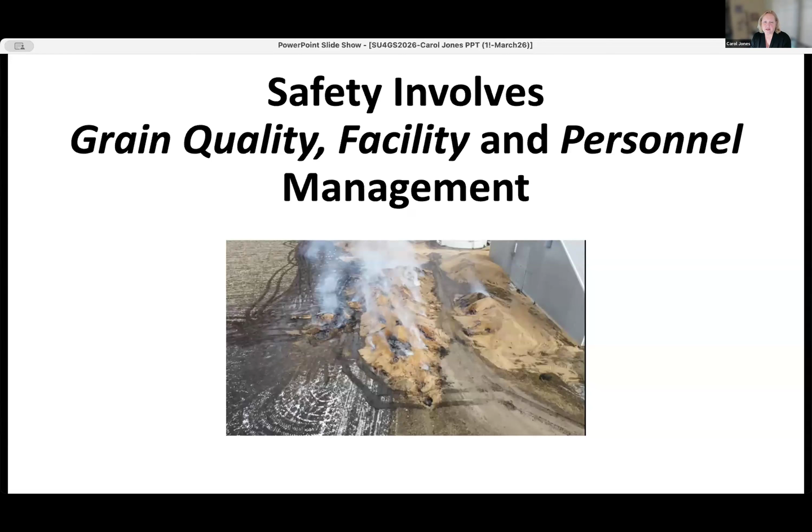So today we're going to talk about just the design and the equipment and some of the processes that are involved with that. So we're going to talk about one piece of the puzzle today, but please remember that none of this stands alone. It's all part of a system. So we're going to talk about, go to the next slide, please, why this makes a difference to us.

And obviously, profit, I won't say it's our number one goal because safety is, but profit's right up there with it. If we don't keep people safe, we don't make a profit. And if we don't make a profit, none of us come to work the next day. So we have to remember that we have economic decisions to make also. But the safe working conditions are just paramount, and our industry is one of the most dangerous industries.

Of course, I've seen you've got some pictures of fires there, but we have the engulfment and entrapment problem. We have high angle rescue type situations because we're working up on top of our bins and get into trouble up there. There's just so many things that can go wrong in our facilities that are very unique to this industry.

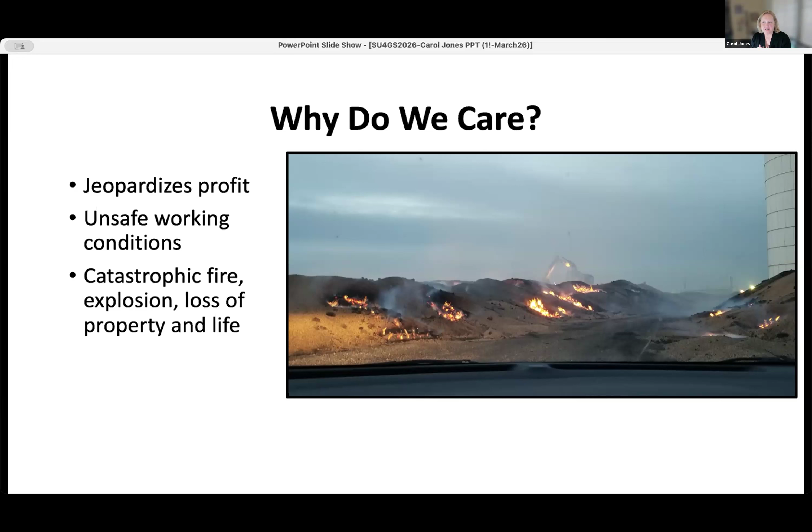So we will talk some about the design of our facilities that can help keep us from encountering some really catastrophic things, whether that's fire, explosion, loss of life, loss of property, engulfment, entrapment, bin collapse. All of this ties in together into one topic of designing our facilities so that they are profitable and that they're safe. Go to the next slide, please.

We hear a lot about moldy grain because that is one of the major safety issues that we encounter, and it's a problem all over the country, but particularly where we have situations of fluctuation of temperature. I don't know about the rest of the Midwest this year, but we have had numerous days, including today, where we start out at close to freezing and we're at 90 degrees, even in March, this early in the season. And those fluctuations of temperature are what cause condensation.

Our facilities many times have leaks, things that maybe maintenance could help us with. But the condensation that comes down in on top of our grain or down the side walls or up in the headspace, from a design standpoint, is impacted by our management and design of aeration systems and the vent structure in the top of our bins.

When we do have moldy issues, it's like the top left picture there, I can see all kinds of bad things about that. He's working without a harness, and there's these big clumps of grain that have fallen, stuck together grain are coming down. That's all a moisture issue that bin has encountered.

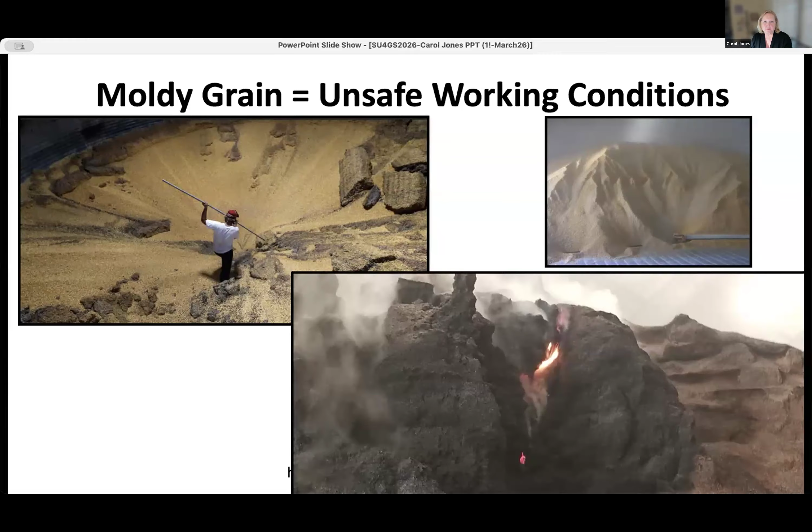As I just mentioned, we've got the self-combustion problem. It happens with moisture. Moisture leads to mold, and insects, particularly in the southern part of the United States or in a warm area, can actually set up housekeeping in our bins, usually in the top, in the middle, or around the access points, unloading points. They will populate to such a point that they generate heat and it could actually cause combustion.

So make sure you check your fumigation plans and stay on top of that. And we'll talk more about detecting this heat generation in a bit. Next slide.

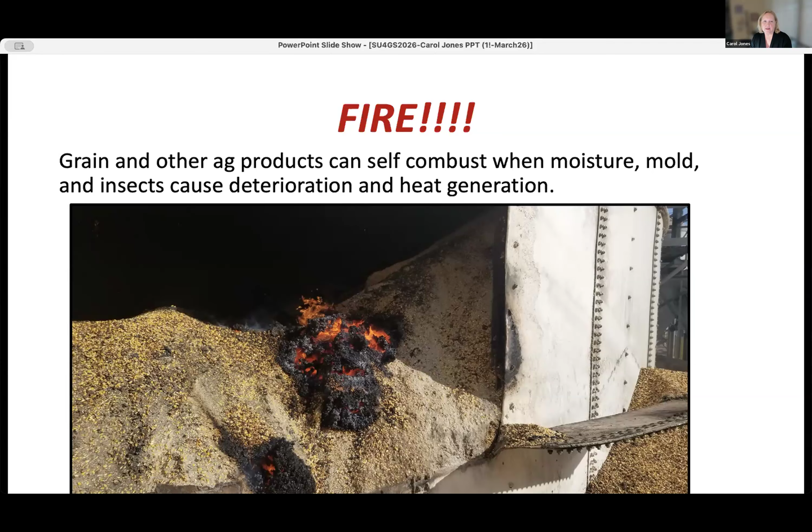Get more into the design and maintenance of our facilities. We've got two pretty impactful pictures here. Anytime we have a sloped floor in a bin and we try to aerate that, that's some real challenges. You need to work closely with your aeration contractors to make sure that we've designed that aeration system down into that cone underneath our bins.

This one, their aeration system didn't work, and they didn't think that would be a problem because they put some pretty dry grain in the bin. But as you can see, we had a problem. It actually self-combusted because they were not able to aerate.

They had some moisture issues down in the bottom of this bin, probably from some high humidity in the unloading area underneath this bin. They did not have temperature cables that went down into the cone and they weren't able to detect it. So they found a big problem when they went to unload this bin.

And over on the left, again, we see a self-combustion issue that happened down in the grain bulk. I'm not real sure what caused this particular situation, but I do know they weren't monitoring temperature cables.

It's one thing to have temperature cables, and that's a great design, and temperature cables are indeed your communication with your grain and storage. It tells you so much, even if you don't have a very intensive set of cables. Monitoring those cables, that's your conversation with your grain. That's when your grain can say, hey, I've got a problem, and if you listen to me now, we can resolve this. If you put it off, I'm going to have some big problems.

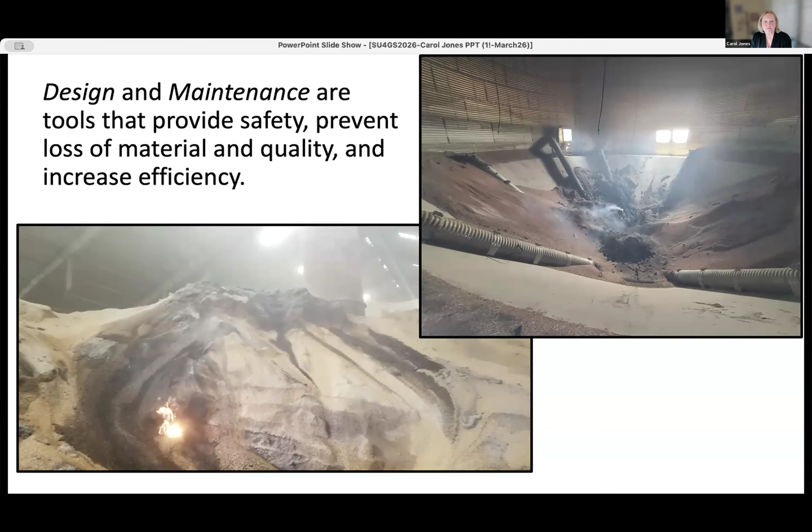So how do we do all of this? Where do we start to look? And there's a lot of resources out on the web. All of your bin manufacturers have great educational resources. Of course, GEAPS, NGFA, most of your land grant universities have information out on the web, and it ranges anything from the quality of the grain to safety to bin design and management.

So be sure and go out and look for some of that information. And most of us agree on just about all of the topics, so you can assure that you're getting good information. The American Society of Agricultural and Biological Engineers is another great opportunity for you to get information.

Many times it's seen as an academic organization, which it is, but we have many, many manufacturers and industry people as members. In 2018, we gathered before 2018, it's just about a 4-year project. All of the bin manufacturers, the major bin manufacturers, some safety training experts, some universities, some of our larger bin companies and bin users, and some fire departments actually came together in a group to talk about what kind of standards we could put in place to make our grain bins safer.

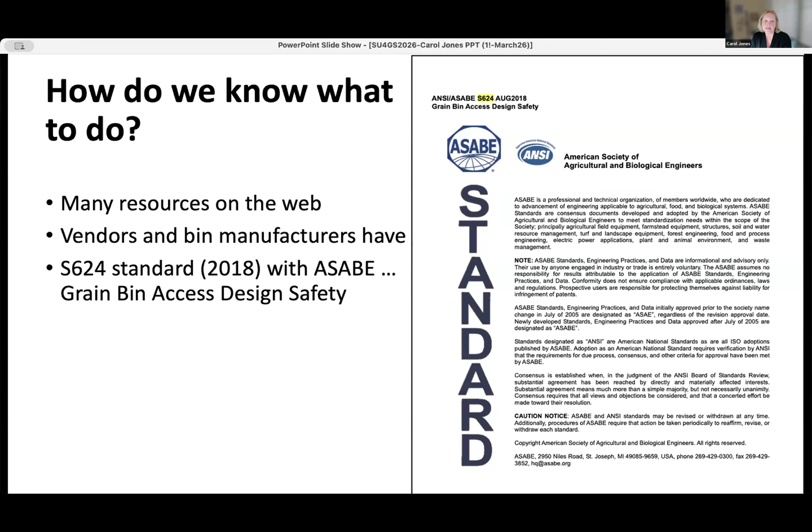Next slide, please. The first thing we wanted to address in this standard was bin access. I'm sure all of you, if you've not had this happen at your facility or experienced it yourself, you've heard stories about access to the bins. Someone stepped out of the bin and missed the little 6-inch step that was not in the right place and fell backwards and hit their head, causing a concussion protocol. Maybe there's no place to step when you step in or out of the side access. And so we put a ladder under it. That's probably not the best practice either, on the inside or the outside.

Where our manholes or our access on the roof is located is a huge, huge issue. I would say 75% of our bins out there, the ones that I've seen anyway through the years, that manhole is probably 90 degrees around the side of where our ladders and our platforms are. Well, that exposes your worker to just a free fall environment there for a quarter of the way around our bin just to get in the hole. So when we put our bins up, if we can put those manholes closer to our ladders and actually have a platform underneath, that's a much safer situation when you try to work through that open access on the roof.

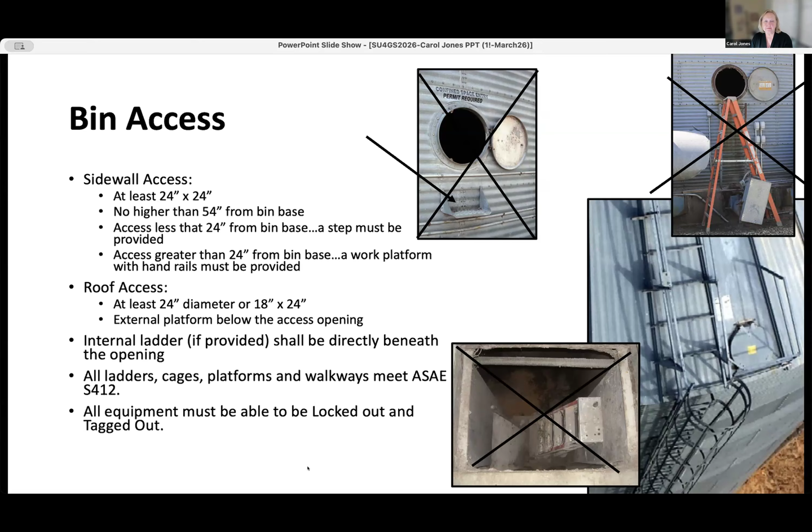The next thing that I'd like to visit about in this standard is anchor points, this idea of attachment points. And that is something that, other than one manufacturer through the years, has not been provided. There's no place to tie off to. If we wanted to, we couldn't, because there's no place to tie off to in a steel bin. Sukup, I think, was one of the first bin companies that actually provided an eye bolt on their bins, and they were well ahead of their time. Long before this committee for the standard was developed, they were doing this. So we looked to them for some information.

There needs to be two anchor attachment points, one near the peak of the bin and then one near the roof access, in other words, the manhole. The one up in the peak is for a pulley, a knot-passing pulley. And you can see there in the slide what the weight limitations need to be and how that was determined by our committee. A lot of discussion went into how much weight does this need to handle. And so a minimum ultimate load of 2,000 pounds and a working load of 1,000 pounds. And these attachment points are meant for one person only.

Why then do we design for 1,000 pounds? Well, many times we need to withstand an impact. Perhaps our person loses footing and drops a ways, or they break through a bridge and they take a pretty good fall. So those anchor points need to be able to withstand that impact.

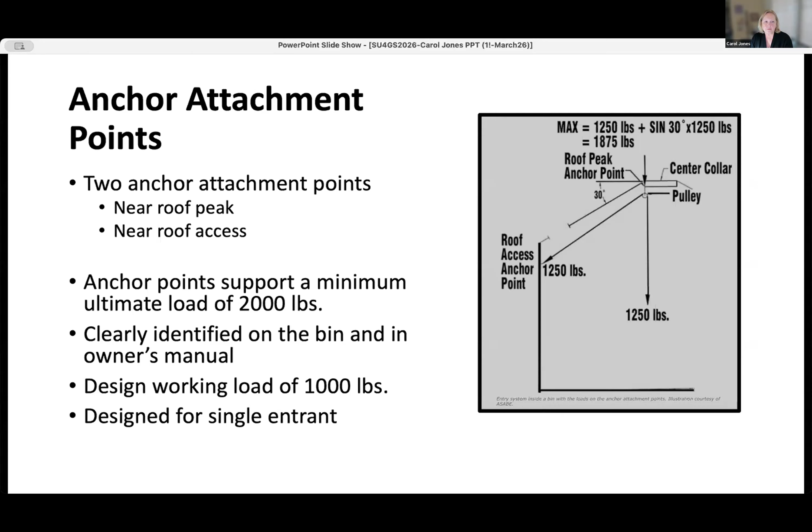Safety decals. Of course, ANSI, ASABE, and a couple of other agencies, including OSHA, require different bin decals. These are the two that are the most often used and most often required. Make sure that those are readable. Make sure that they're bilingual. And unfortunately, I didn't pick a picture where they were, but make sure that you have your language barriers covered. Pictures are good because they bridge the language barriers. Our Global Harmonization Act really helps you with that.

Go out and look for those pictures, but make sure that your decals are not so old and faded and cracked that they can't be read. So, do workers read them? Well, I hope so. Sometimes we have to do the best we can and hope for the best, but they sure can't read them if they're not there. So be sure to have all your decals in place. Next slide.

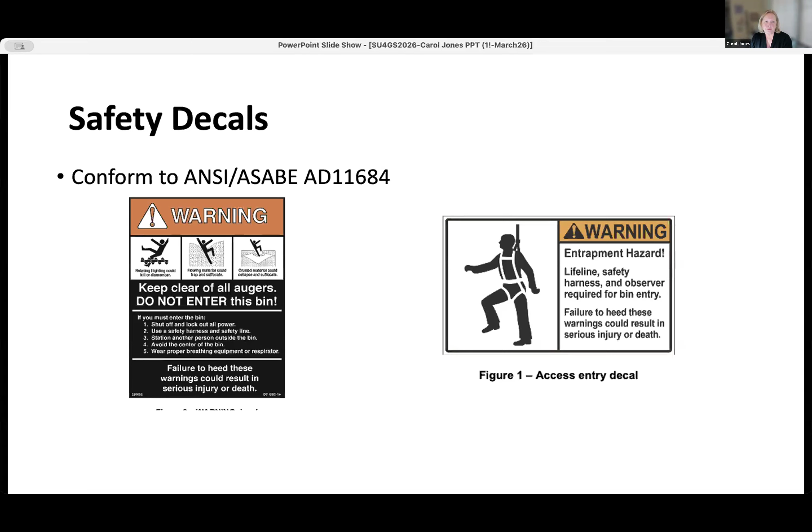Talk about these fall prevention systems. The two anchor points near the roof and near the roof access are important, with the pulley being up in the roof peak with the knot-passing pulley. The rest of that system includes a full body harness. This is not your lightweight working harness. We're talking good attachment points, padding around the legs.

If you've ever had to hang from a harness for more than just a few minutes, you'll be the first one to go out and buy one of these harnesses that has the good padding around the legs. That's part of the safety issue also. We don't want to cut off the circulation around our legs. Going to have a sufficient rope. If you've got, say, a 90-foot bin, your rope's going to have to be at least twice that. Okay. And of course, the anchor, we've already talked about the anchors.

Now, an important part of this is not even a structural part, but it's an attendant at the opening. It is an OSHA requirement, and then just a really, really good idea to have someone working there at the access point of the bin. Their only job is to stay in contact with the person in the bin and to call 911 or alert someone if there's a problem. Their job is not to go get you water. It's not to go get your work clothes. It's not to hand you a flashlight. That's not their job, and they're not supposed to do that.

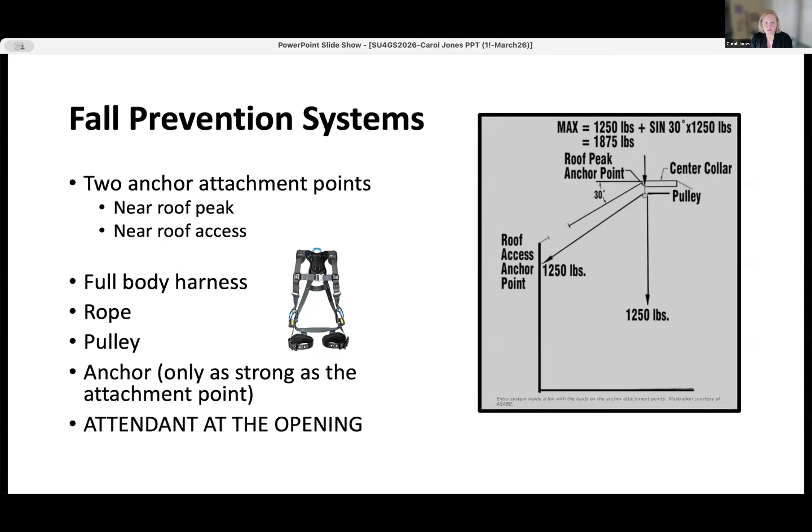Their job is to make sure that they're in contact with you some way. It doesn't have to be verbal. It can be line of sight. It can be by radio, but some kind of access and attachment communication with the person in the bin. So that's a piece. That's just as important a piece as the full body harness or the ropes or the pulleys. So make sure you work in pairs. Next slide.

We'll switch from entrance safety to outside of our bins, and we've talked about electrical safety for all of our lives. I can't remember a time when we didn't talk about electrical safety. But I guarantee I could walk in any facility this very minute and find a problem. Electrical safety encompasses every single inch of our facilities, and it's an easy thing to overlook. Our older facilities, times have changed. Our regulations have changed. Our knowledge base has changed. What equipment is available to us has changed.

So let's kind of look at some of these pictures because some of them are more intuitive than others about what the safety problem is. But of course, we start with the plug-in up there in the top left. It has a crack in that bottom receptacle. That needs to be fixed. If it's around any moisture, it needs to be a GFCI type plug-in. If we go down below, that looks pretty innocent until you see the opening in the side of that box.

That's a safety hazard. This is a little side story that I'm not sure Oklahoma State University would like me to share, but they shared it, so I guess I can. About a week ago, we had a lizard get in an electrical box on campus, and it shut down at least half the campus and our electricity. Of course, it blew the breaker and shut things down, so we didn't have a fire or a catastrophe. But it was because a lizard could get in one of these boxes. So make sure that your boxes are sealed tight. Also, from a dust standpoint, that's just essential.

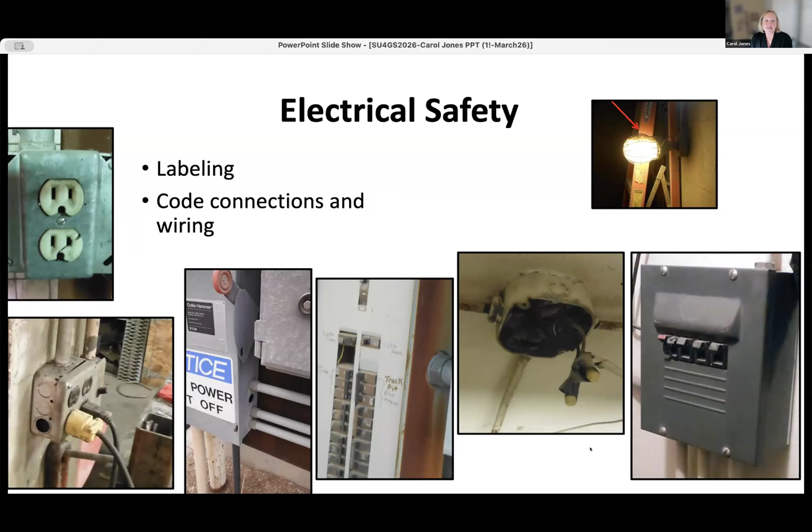Just a little more maintenance for electrical safety. Cords are notorious, particularly if they're outside. Make sure that your cord's insulation is in good repair. I see in the chat here that some of you are offering good information. Hire a certified electrician to perform these repairs. Often repairs require entry into panels or equipment that will need to be de-energized and tested. Very good point. If you don't have a certified electrician on your staff, one of your personnel, then hire that done. That's the best way to know how to do it right, is hire the people who know.

Okay, hopefully I don't have to explain that next picture to you, why that's an unsafe situation. And then the conveyor picture there with the red arrows going straight down. Yeah, we've got wire nuts on it, and it looks like they've pretty well covered most of the wiring, but that's not a safe practice. So that needs to be in a box that is rated appropriately and enclosed.

Again, we have a light fixture there with a glass bulb and nothing over the glass bulb, and it appears that there's liquid in there. I can't think of how unsafe that light fixture is. Hopefully, there's no energized wiring going into it. We can't tell from the picture, but I can think of about a dozen things that could go wrong with that, and I think all of you are well aware of that as well.

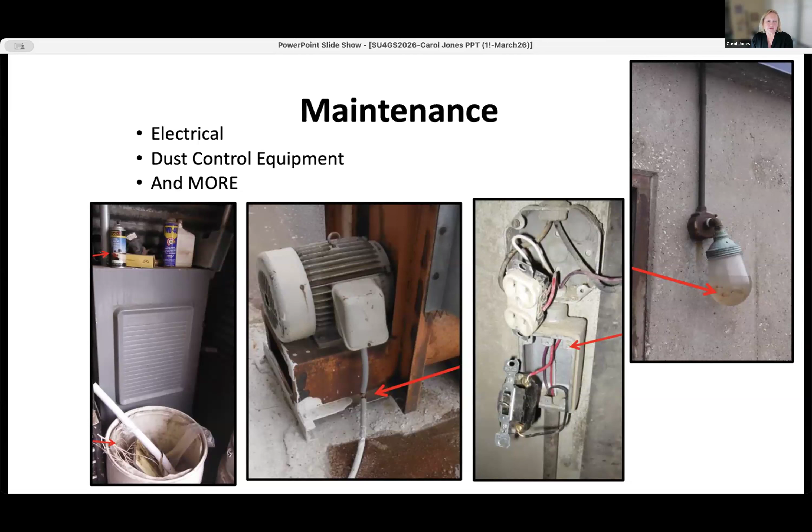More maintenance. Of course, I've got some of the electrical pictures here, but this panel over here on the left, we've got things stored on top of a panel box. We've got things stored in front of it. It's dusty, it's dirty. Those are housekeeping issues. So make sure that you don't see that in your facility as well. Next slide.

More housekeeping issues. The picture on the right, it would be very hard to access any of those control panels. And if there is some kind of a sparking issue, you've got a lot of paper products and equipment stored underneath. It's just a housekeeping issue. That material needs to be stored properly, and storage properly is not under the electrical boxes.

Let's look at the tunnel here in the middle picture. That could be an electrical hazard, but that wasn't my point in putting it in the presentation. Obviously, they've had an unloading spout spill and it hasn't been cleaned up. This probably didn't happen just in one afternoon. So inspect your tunnels and keep them open and clear. This obviously could be an explosion hazard. It's certainly a worker hazard, a slip and fall hazard. It's going to back up into any rotating equipment in there and cause heat, and several things can happen when we have a hot spot in a facility like this.

So housekeeping is part of design. Now, if you have a tunnel that is too small for someone to get in and clean, that's a design flaw. If you can't get to the bearings and to the unloading spouts there, and where it's easy to clean, that's a problem. It's going to get done a lot more often if your workers can walk through the tunnel unimpeded. So be sure and check that. If you're in a lucky position of designing a brand new facility, I've seen some great examples of tunnel design now. That's something that our industry has improved over the years, and hopefully you'll keep that in mind.

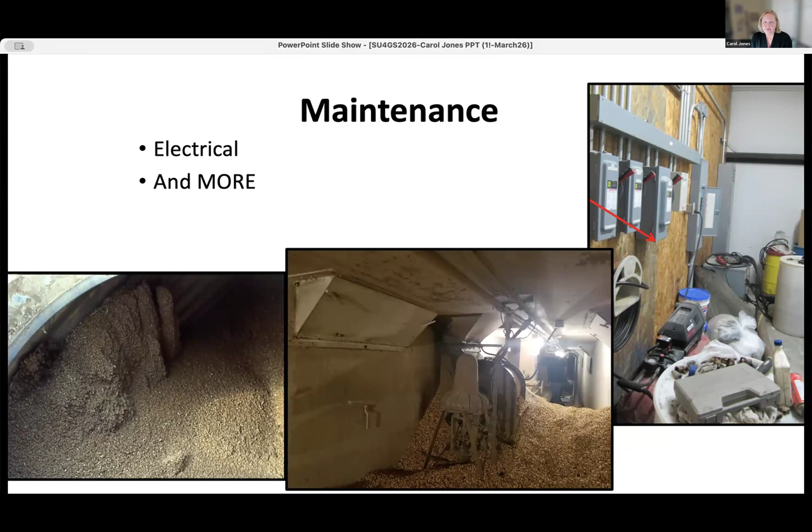The picture on the far left there is one I've used for a lot of presentations. That was caused by a leak in a manhole cover on a concrete house, and that clumped material goes 100 foot down the side of that bin. So checking to make sure that you have good seals on your manhole covers exposed to the outside environment needs to be part of your maintenance procedures. Also, when you're building a new facility or you're replacing manhole covers, make sure that they fit well. That will help keep your grain in better condition. Next slide.

Just more terrible looking pictures here. The one on the left is obviously an explosion hazard. That's a rotating shaft in the middle there, and any kind of friction around that shaft is going to cause some heat. We got extra bolts laying there. Who knows where those came from? So that needs to be cleaned up and the area inspected and repaired.

And then another ugly tunnel picture. It needs to be cleaned up. We do have a shovel available. That's a good start. But we need to use that shovel. We need to get that cleaned up and figure out why that spill is there. It's one thing to clean up a mess, it's another to find out why the mess is there in the first place. That's when the real work starts and the real effectiveness starts. It's when you find out why you're having these kind of problems to begin with.

So is it a controller problem and we didn't get something turned off at the right time? Do we have a leak in the conveyance system? Well, where's all this grain coming from? And how can we keep it from being there again? Okay, next slide.

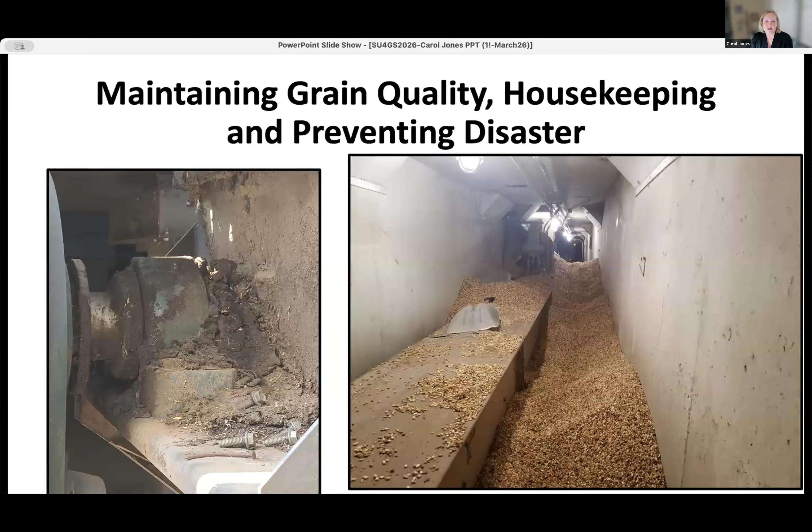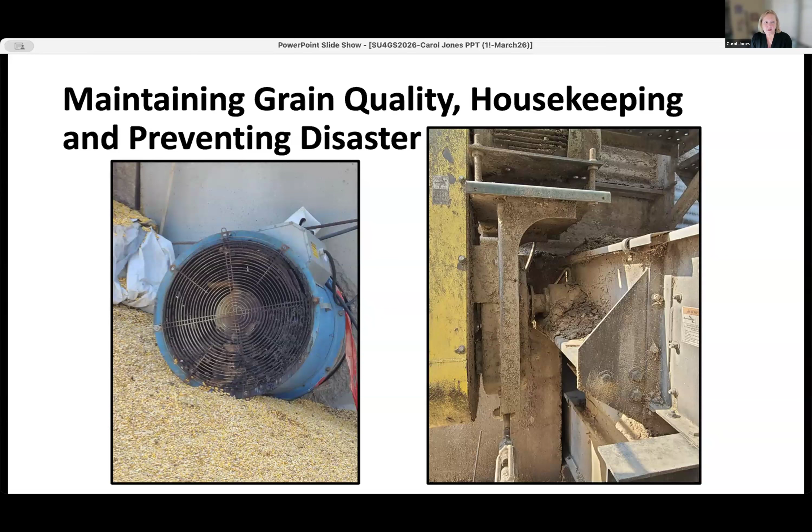More ugly pictures. I have a stash, and John Lee and some other very helpful people have added to my stash of ugly pictures. But anytime you have rotating equipment, it needs to be free and clear with nothing but air around it. We just can't have the heat build up. That kind of interference with material is a real problem for explosion. It's expensive because you have to put more electricity through this material and through this equipment in order to overcome the friction it's causing. So for a lot of reasons, that needs to be cleaned up. And again, find out why it looks the way it does, what caused the problem to begin with. Next slide.

Let's talk about air vents. Sometimes we don't think about that being part of our design structure, but the air vents up on top of the bin, both powered and passive vents, are part of your aeration system. It's not a separate thing. They have to be sized to accommodate the air going in or out of your bin.

Picture in the bottom right corner there, the top of that bin's not supposed to look like that. That had some vents that were iced over. Had a big snow ice problem. They were iced over. Someone turned on the positive pressure aeration system, and that popped in about 2 seconds. That was an expensive day. So make sure that you have adequate venting on top of your bins.

And if you're building a new bin and you have the decision to make how many vents to put on top of your bin, add an extra one. Okay, more is better. It's a little more expensive, but it's a whole lot cheaper than replacing a roof like this one on this bin.

Also, if you don't have adequate vent spacing in the top of your bins, that's when you see your grain getting rained on. I had a person who had a brand new bin, really nice bin, call me and says, no matter what I do with my aeration system, it keeps raining down on my grain. Says that looks like a golf course in there. It's sprouted. I don't know what to do. I have tried every management I know how.

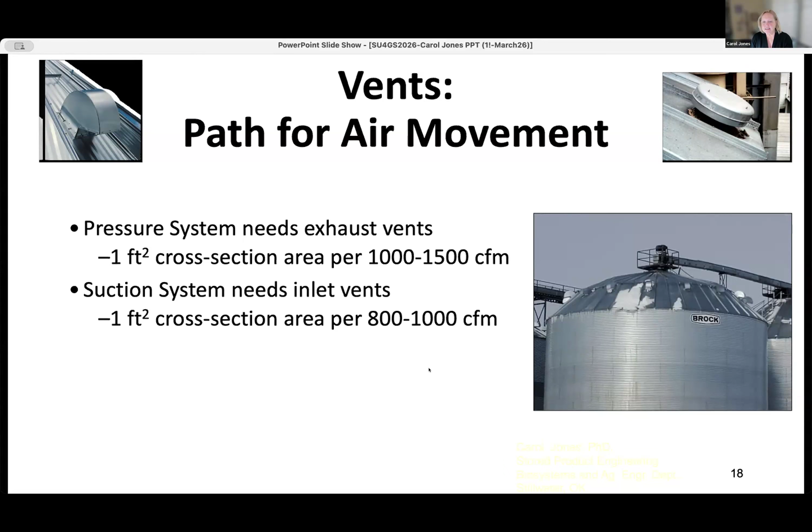And then the original design to make sure that the capacity of the air ducts on the floor going down in a cone is very important. That needs to be a positive pressure system if you're going to use ductwork down there. If we pull air down into the V-shaped bottoms, you're going to cause yourself a lot more problems than you want to deal with. So make sure that you're pushing air instead of pulling air through those. So I hope I addressed your question. If I did not, ask it again and we'll get a different answer.

Go to the next slide, please.

Let's talk about steel bins and bolts. Obviously, we all know that when there's a bolt hole that doesn't have a bolt in it, we have an access point into our bin and moisture can get in. But there's another phenomenon going on here that we need to be well aware of. We've got several bolts missing, all in one place there. And as you can see, we've got grain that has spilled out, or it's actually glued to the sealing system, the foam tape that's between those two panels.

That bin has shifted. Those panels have pulled apart, and in this case, it pulled apart enough that that's about an inch there. That bin's going to eventually be unstable. We need to find out why that bin shifted that much. Okay, it sheared those bolts, not because they were bad bolts, but because they have their limit on how much shear those bolts can handle.

So when you see missing bolts in a steel bin, make sure you find out why that bolt failed. It's one thing to replace it, which you definitely need to do from a moisture standpoint, but find out why it shifted enough to shear off the bolts. So maybe your foundation isn't exactly level. Maybe someone unloaded or loaded the bin not symmetrically. There's some kind of a force thing going on with those panels that pulled them apart like this.

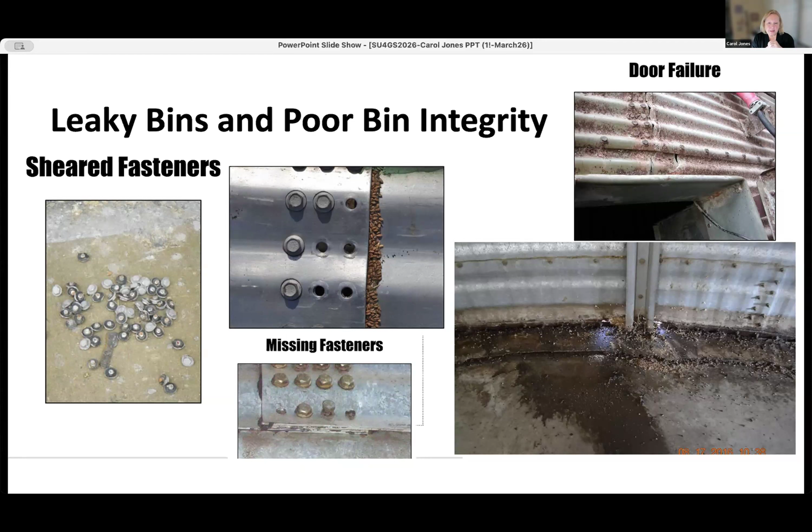So making sure that our doorways stay in excellent condition and they don't have a lot of wear and rust to them is so important because they have to handle that force coming down from that stiffener now. And of course, down in the bottom picture, obviously we've got some rust problems, some leakage from someplace, and that stiffener is not doing a job at all because it's not even attached to the ground. It's rusted through. So things that we need to consider and fix. Next slide, please.

What do empty bins tell you? Well, underneath the floor, if you've got a perforated floor, it's going to be jam-packed with all kinds of fine material, maybe the insects. Your aeration's not going to make its way through all of that material and do its job. So find a way to clean underneath those floors if you can. You have to call a millwright many times, but we need to check on that. Looking for discoloring on the walls. Let's go to the next slide, please.

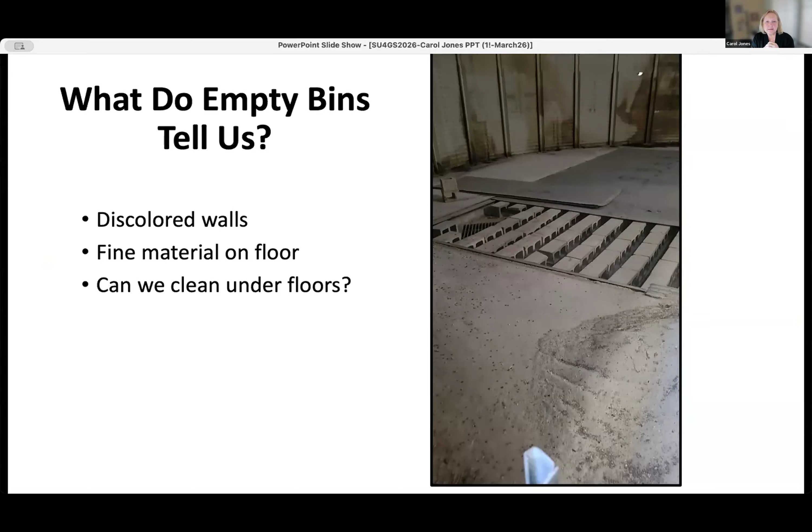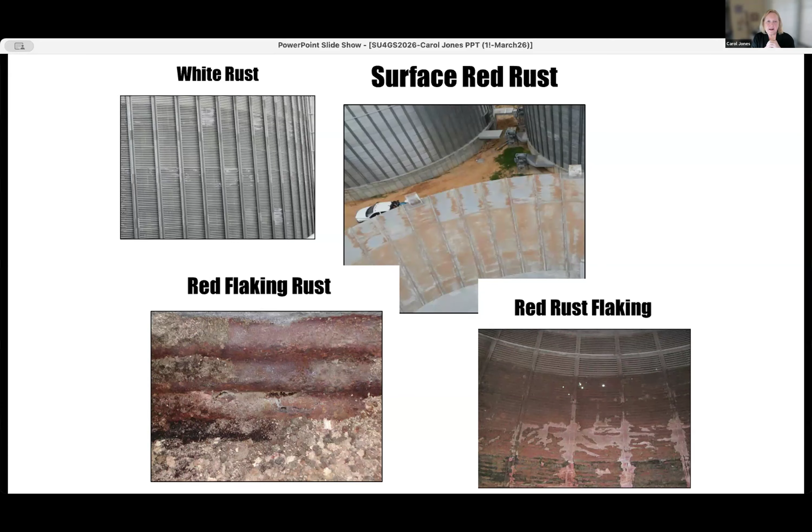Next slide. I think we're kind of winding down here, but cleanliness is so important. Maintenance is so important. Being aware of your facilities. This is an industry that never standardized on much of any kind of design. Every bin is different, and your people know that bin better than anyone. So ask them their opinions. What could we do to make this bin safer and sealed better, whatever the issue is you're trying to remedy. Ask them what their approach would be because they know the personality of that bin.

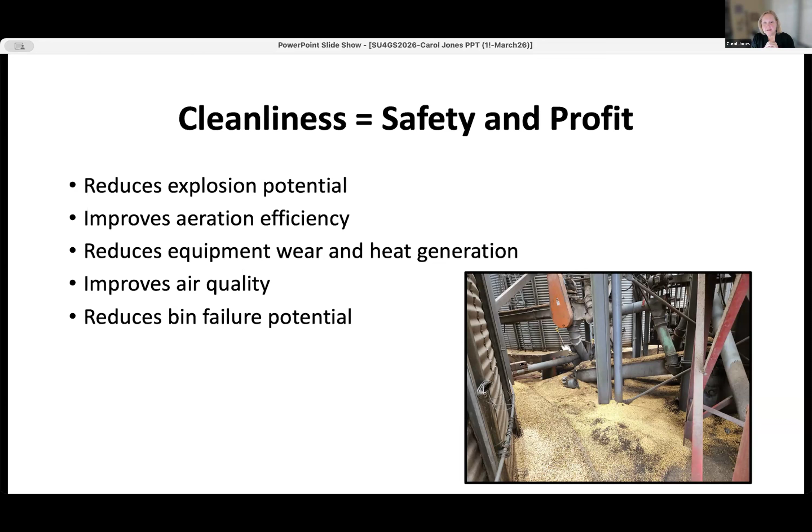We need to make sure we keep our explosion potential to a bare minimum, improve our aeration efficiencies. That helps with keeping our grain in good condition. It also keeps our energy use down, reduces equipment wear and heat generation, and improves your air quality. If we have a lot of dust, that is part of our dust triangle, our explosion triangle. So make sure we keep our dust down, and then reduce our bin failure potential just from maintenance of our structures. Next slide.

So, had another mention in the chat. If you're not watching the chat, there's a lot of good information on there. Replace bolts with the same strength bolts, not just bolts that fit. Very good point. And look for the quality of the bolt too. Some there may say that it's rated for a certain strength. Find out where it was manufactured. I'll just leave it with that. But make sure you use good equipment.

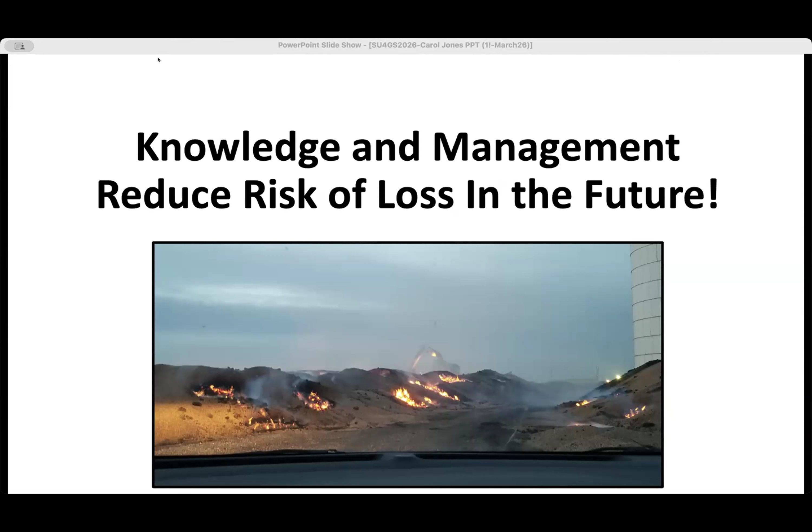Thank you, Carol. Thank you for inviting me. I love doing this. We love having you. Let me know what I can do if we have questions or whatever. Okay, I put your presentation on a PDF and put it in chat, and then your email. Perfect. And Sahar, you can quit sharing the screen now. Okay, thank you. Good job, Sahar. Oh, thank you so much. Thank you, everybody. I'm glad that was helpful. See you all. You did a great job. Right on target. Yeah, I enjoyed your presentation. Thank you. All right, let me know what you need, Catherine. Thank you very much. Bye. Bye, Barb.